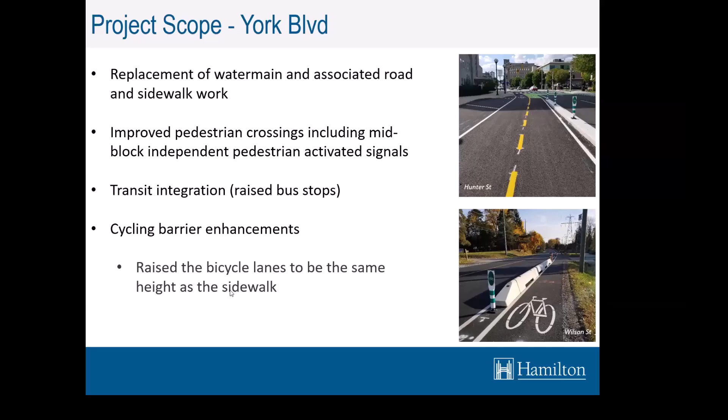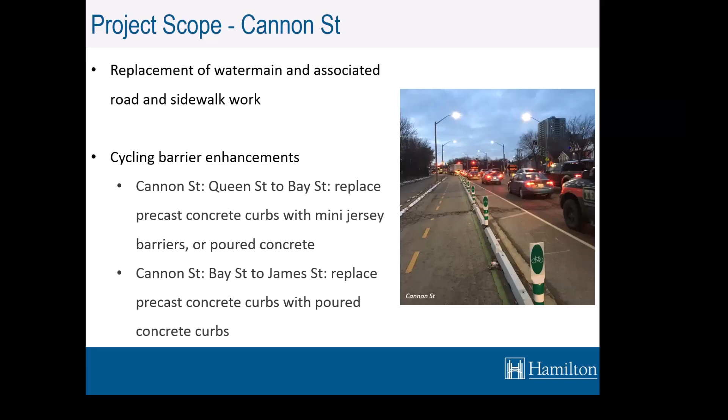Also, on Cannon Street, the replacement of the water main and associated road and sidewalk work will take place. That's the heavy lifting in that section. Cycle barrier enhancements will be done on Cannon Street between Queen and Bay, and Bay to James. They'll be replacing those precast concrete curbs with poured concrete curbs, so much nicer.

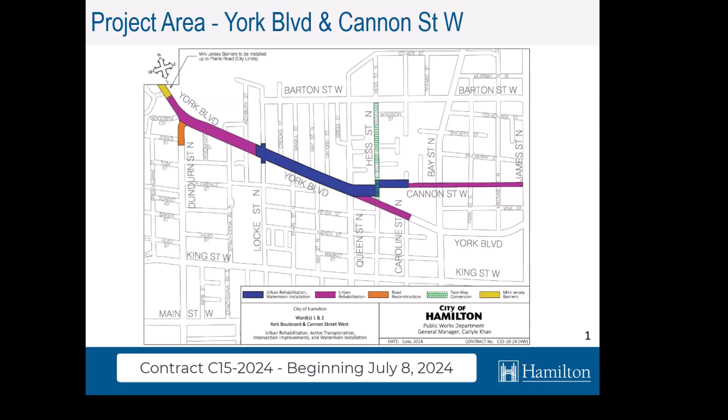Thanks, everybody. The City of Hamilton has a contract with Green Infrastructure Partners, GIP, to complete the works called for under contract C15-28-24. Construction is scheduled to commence on or about July 8th, 2024, with the north side being completed by December 2024, and the south side in 2025, starting in April 2025 and completed by August 2025.

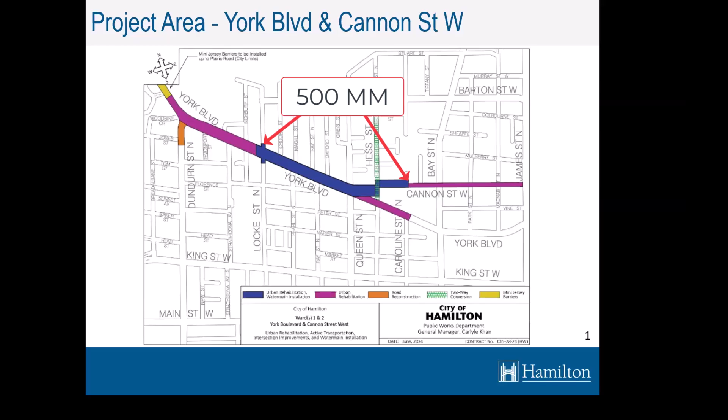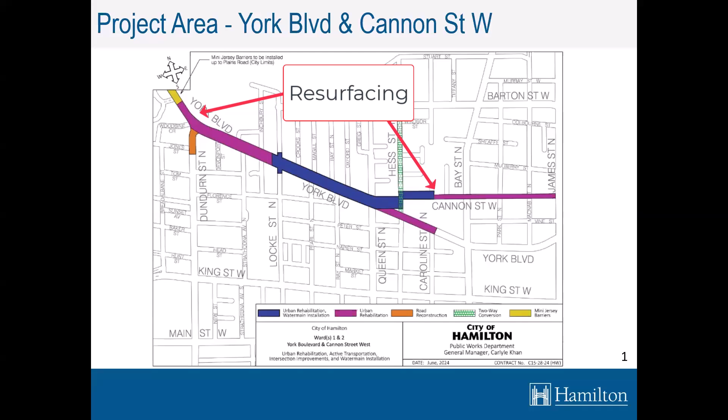The works are as follows: a 500 millimeter water main installation from Locke Street to Caroline Street, road resurfacing on Cannon Street from James to Queen, York Boulevard from Caroline to 100 meters west of Dundurn Street, and road and sidewalk reconstruction on Dundurn Street North from York Boulevard to Jones Street.

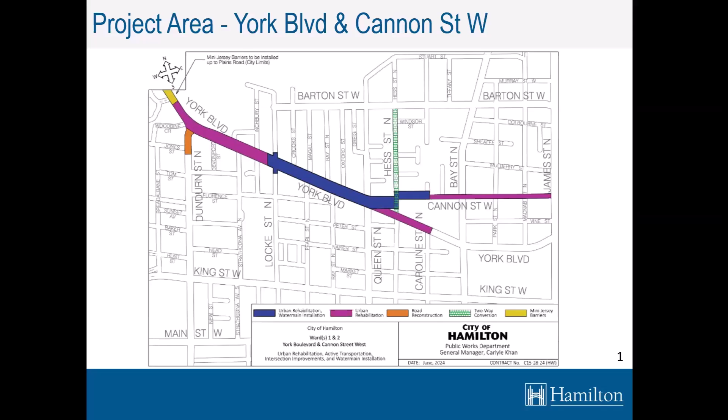There will be intersection improvements at Cannon Street, McNabb Street, Bay Street North, Hess Street North, and Queen Street North. York Boulevard will have intersection improvements at Hess Street North, Queen Street North, McGill, Pearl, Locke, Rolfs, Strathcona Avenue, and Dundurn Street North. Two-way conversion will happen on Hess Street North from Barton to York Boulevard.

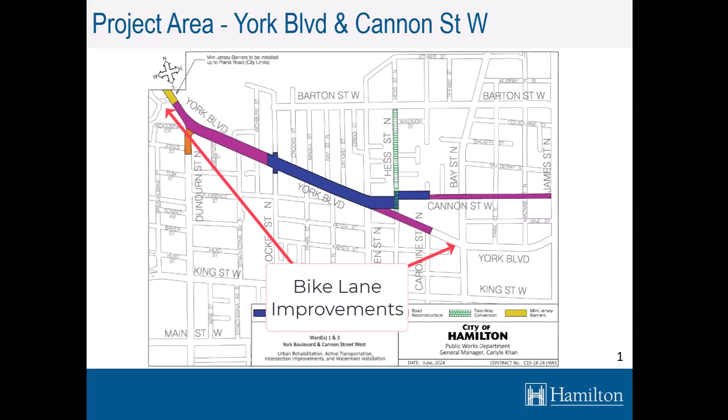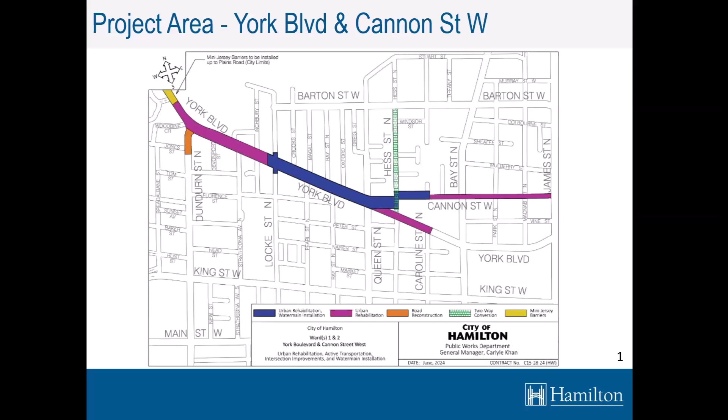There will be active transportation track or bike lane improvements on Cannon Street from James to Queen, and on York Boulevard from Bay Street to the City of Hamilton limit to the west. Just a note that all EMS services have been consulted on the upcoming works and are working with our team, attending bi-weekly site meetings to ensure there are no delays in emergency services to the area.

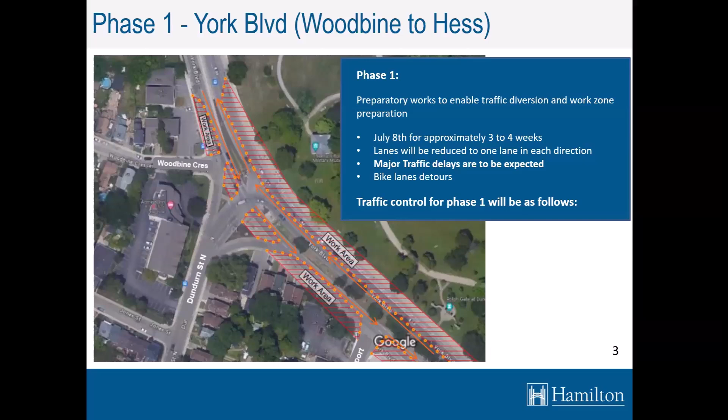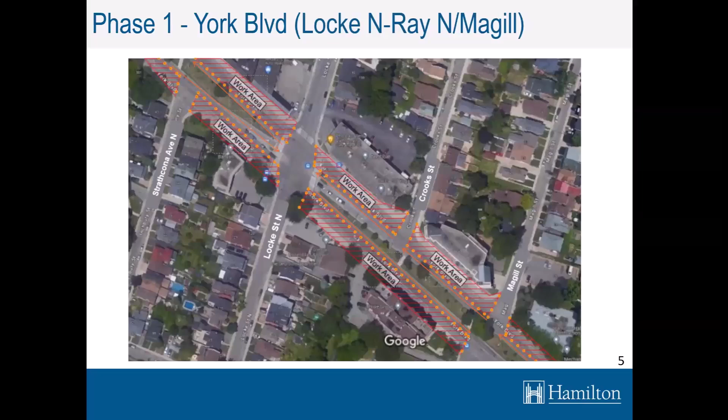That's going to take approximately 3 or 4 weeks. Once this is completed, you can scroll through the next couple of slides showing that section up to Locke, then the next section takes us to Magill and continuing, and this one takes us to Oxford, and you can keep going through there.

This takes us right to Queen Street. Once all of this work in the preparatory stage, or phase 1, is completed, we will be moving all traffic onto the south side of York Boulevard. So we can move to the next screen.

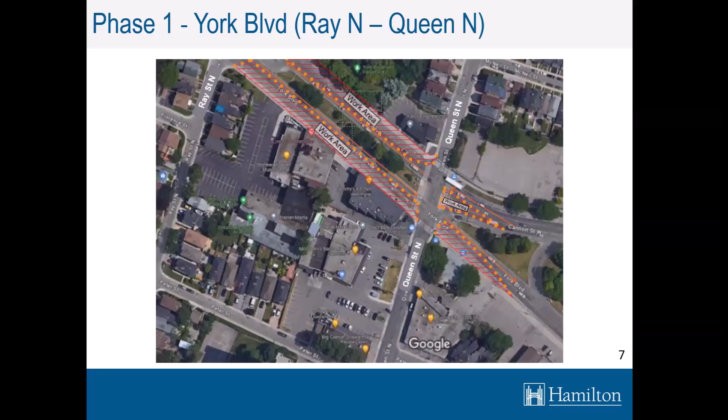I don't like being the bearer of bad news, but unfortunately, with the progress of having this complete reconstruction carried out, there will be traffic delays. So it's always best to try to find another route to the west or east if you live in the area, or if you're joining us from outside of the area, to avoid this section, perhaps moving up to King Street or even further south to bypass the downtown area.

So what this means is that regular through traffic will not be available to York Boulevard. However, as we had mentioned, EMS has been consulted on this, and we will be in constant communication with all of the EMS units to ensure that should the need for access to one of those roads arise, we will be able to get them through the construction site.

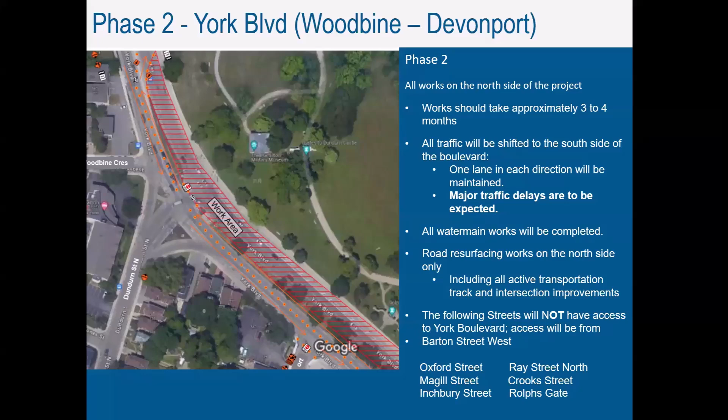And I just want to add that in the case of Inchbury, you're going Barton, Locke, Tecumseh, Tecumseh up Inchbury. So that's if you're accessing the business at York and Inchbury, you will have to come up Inchbury from Tecumseh to be able to access them. Yes, north on Locke, and then you'll head west from there, eventually making your way.

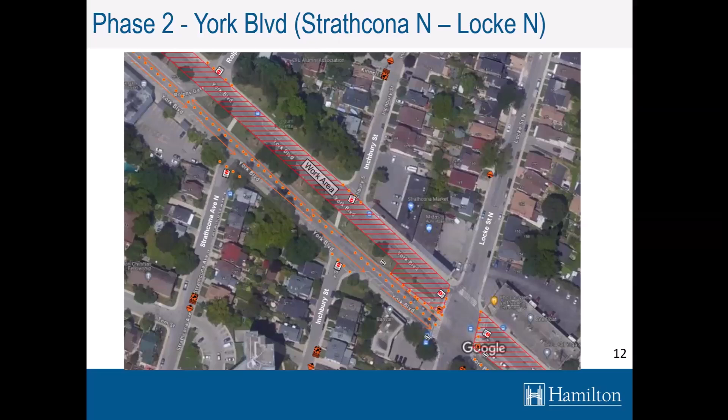Okay, so you can see here, we're working through our slides, Strathcona to Locke in this slide, and then the next slide will take us Locke to Magill, and you'll see that the red hatched area on the north side, all of the north side from the boulevard to the boulevard on the north side of York is all hatched out, and that's where all of the work will be going on during 2024.

And you'll see on the south side of the road what looks like a number of pylons down the middle of those two lanes is actually a delineation between the eastbound and the westbound traffic. You will still be able to turn onto Locke Street at the major intersections.

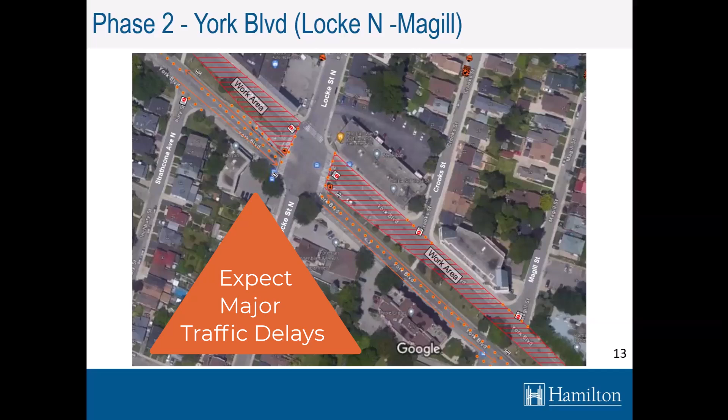Once again, I will revisit that major traffic delays are to be expected. And the next slide, please.

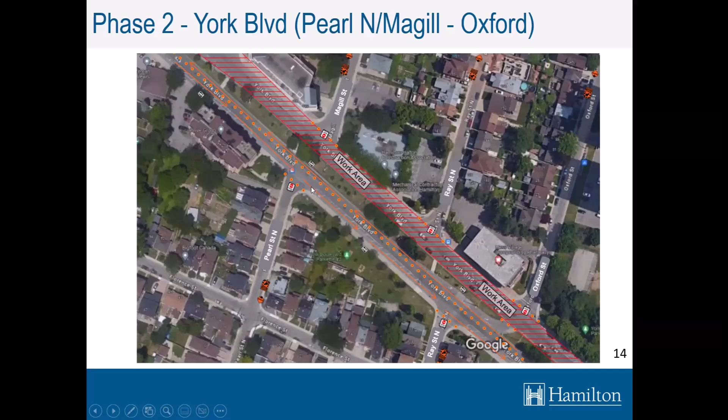And to be clear, on these side streets, there'll be no left turns. If you're going westbound, you cannot turn left into the smaller side streets. Is that correct? Correct.

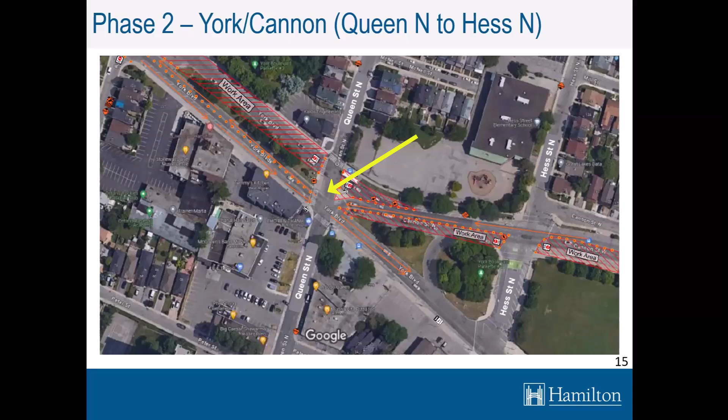We can go to the next slide. And this is the limit of the work for phase 2, and showing the westbound traffic on the north side of Cannon before the merge into westbound on York.

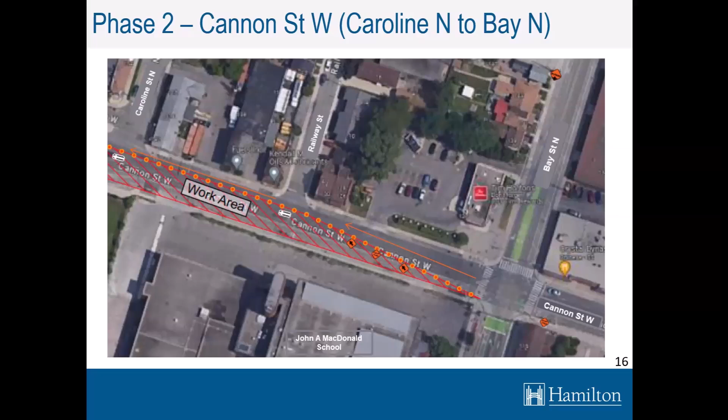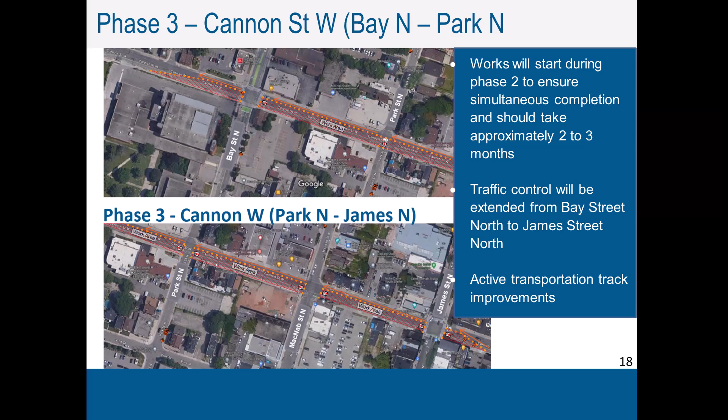Phase 3, the work zone will be extended to include the section from Bay Street North to James Street North on Cannon Street West. The works will start during phase 2 to ensure simultaneous completion and should take approximately 2 to 3 months. Traffic control will be extended from Bay Street North to James Street North, and this includes active transportation improvements, as Councillor Wilson had stated, with new barriers being constructed.

So I just wanted to touch on, when we talk about active transportation, the city does have both eastbound and westbound cycling detours. They are under review at the moment, and they will continue to be reviewed over the next short while until they are deemed to be satisfactory as far as safety goes. And we will release those at the very earliest opportunity, and they will also be posted on the city's website.

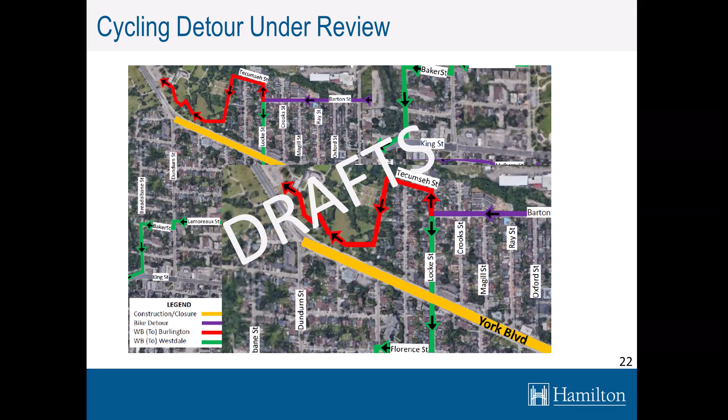For 2025, we will be going ahead and completing the road resurfacing works on the south side, and that will include all active transportation track and intersection improvements, road reconstruction on Dundurn Street North from York Boulevard to Jones Street, and a two-way conversion of Hess Street North from York Boulevard to Barton Street West.

What will happen in 2025? We will be switching the traffic over to the north side, and we will have one lane in each direction on the north side of York, and that will run from April until August.

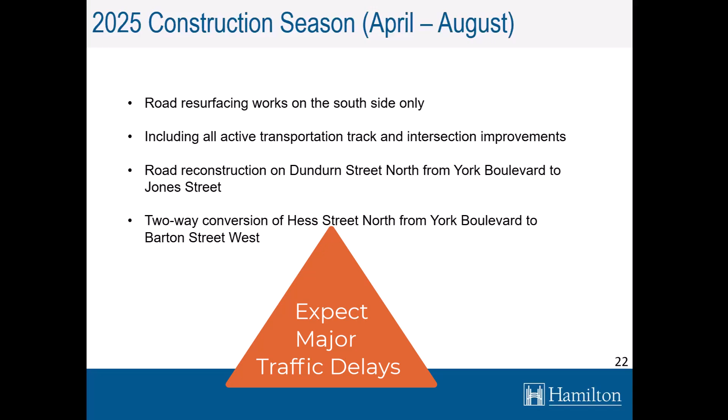And at that point, all of the work will be completed, and we will have our brand new and beautiful York Boulevard and Cannon road reconstruction for everybody to enjoy, as well as the active transportation tracks.

Before we go there, could I confirm, in terms of, if let's pretend we have perfect weather for this, from now until the north side phases are done, will York on the north side open during the winter months for regular flow of traffic, say ideally between December and mid-March, or will it be closed off the entire time until it switches over next spring?

Ideally, it will be completely open at the end of construction this year. That's our plan, to have it completely open at the end of this year. So we will go through the winter with traffic on the north side moving westbound and traffic on the south side moving eastbound.

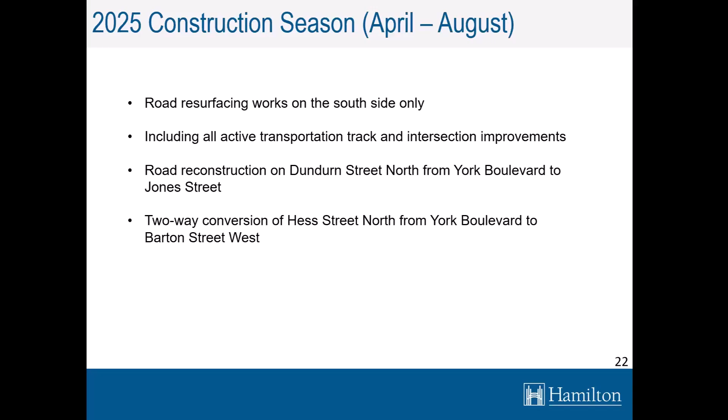Another thing you'll see coming when the construction company moves onto the site on July 8th is that they will be stopping by some of the homes immediately adjacent to the work and asking about a pre-construction survey. Whenever this happens, across all of our projects in the city, we always encourage residents to have a pre-construction survey of their property done.

What they do is look at windows and foundations for your house, just to ensure it's in tip-top shape before construction starts. It's also a protection for you as we move through construction, on the very off chance a problem develops. I don't want to scare anybody, but it's always good protection to have that pre-con survey done. It's no cost to you. The contractor will come by, hire a subcontractor who will then come at a date convenient for you, have a look at your property, and then you'll be protected.

If I could just add to that — on Locke Street, when the major reconstruction was done there, the advantage to residents was clear: it's harder to prove something happened as a result of construction unless you have the pre-construction survey. So if your location qualifies, it's really important that you do it for your own peace of mind.

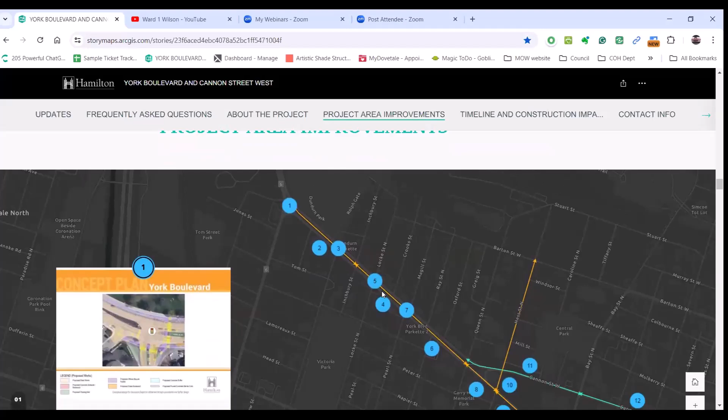Hopefully you can see the story map site, which has a lot of really great information, and will tell you about the project, how the city got there, some of the things that were done in the process, and highlight specific areas of the project to tell you what's happening in them. I thought this was really helpful, being able to click on specific numbers and drill down to what they're doing in that location. Well done on your team's part getting that done.

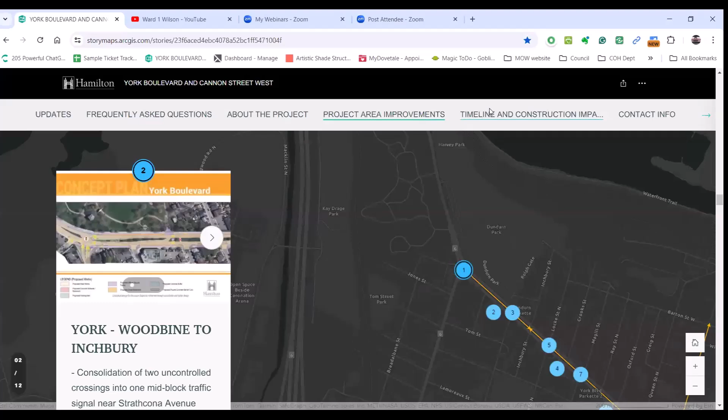I don't know if there's the timeline and construction info, which you're adding more to, and all the contact information there as well. Yes, we will be adding to it as we go along, all the way through the project. We will have updates on where we're at, what the different stages are. So keep an eye on it — make it a favorite on your web browser, and you can visit it regularly to see any updates.

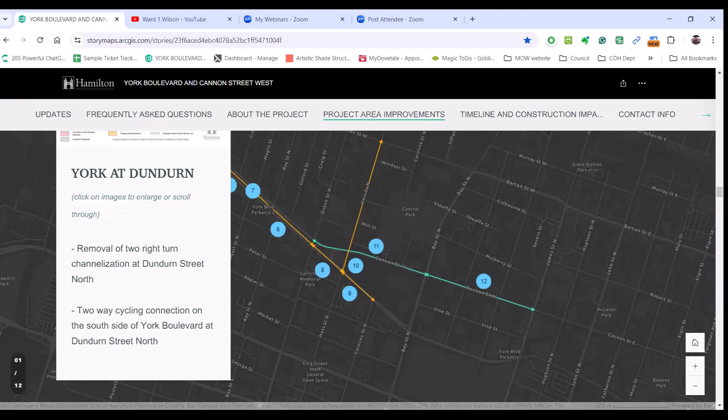And of course, on the city's websites there are always ways you can contact if you have any specific questions. There's also a section for frequently asked questions, and we are currently populating it with some of the questions we get on most of our construction projects. Questions specific to the York Cannon project will be added as frequently asked questions and answers to that section of the website as well. You can see there the contact information for anybody who has questions on the project.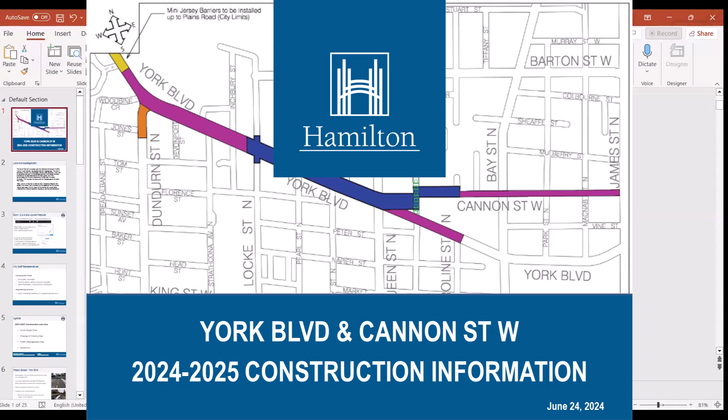Just a little bit of editorial comment from me before we have lots of time to get into the Q&A. This project should not be news to anyone — it's been on and off the books for a long time. In fact, it was one of the first public meetings I ever held, in October 2019, after getting elected.

We held 3 meetings on the design, and just maybe 2.5 months after that, the project itself was put into question because Premier Ford canceled LRT, and the original design was tethered to the LRT project in terms of its environmental assessment.

So we regrouped, and the city rightfully felt work was needed, and we're very pleased to be going ahead. Those 3 meetings were in October 2019. We also had an online meeting at the end of 2022 on the design presentation, and did a walkabout advertised for the neighborhood to walk with us down York Boulevard and talk about life in and around this street. And then, of course, this evening, very pleased to be with you.

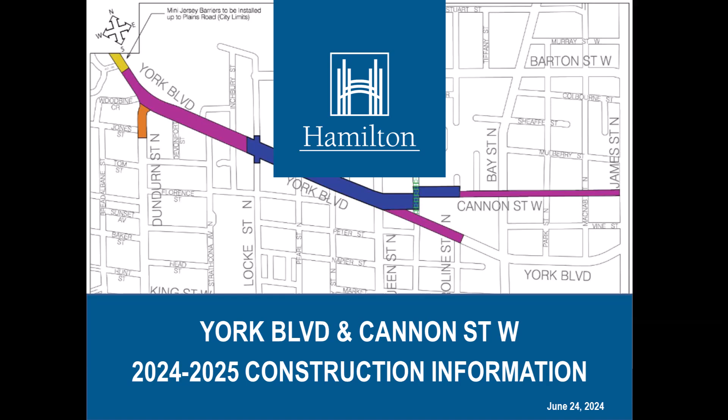Will there be pedestrian access from side streets, for example Oxford Street, etc., to York, or will that also be via Barton? Will folks be able to go up and down York from a pedestrian perspective, particularly on the north side? So folks along Oxford, Ray, Magill, Crooks, Locke, and Inchbury on the north side—will they still have some York Street sidewalk to access during that period of time?

In the reconstruction portion of the project, we are keeping a lot of the sidewalk, mainly between the intersection improvements, where sidewalks will be reconstructed for AODA compliant crossings. The long straight sections of sidewalk in the blocks will be kept, so there will be an opportunity, as long as it's safe for pedestrians, to traverse from the side streets onto that north sidewalk. It's something we'll be looking at and trying to make available for people, as long as it's safe.

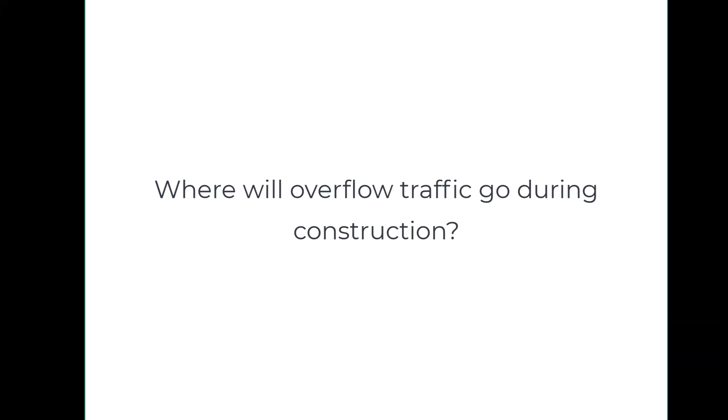Also, a quick note that we are working with traffic to adjust the traffic timing to help the flow, so it moves smoothly through there rather than having odd timed lights just backing up consistently. So traffic will be monitoring that live. They will be tinkering with the timing of those lights and observing it live to see how it best works during the traffic situation and the construction situation.

That's a programming question. So the timing of the lights, as I said, during construction they will be adjusting it, but the final timing of the lights will be set up after construction is completed. It is already on transportation and traffic's radar to keep an eye on this. Once the project is complete and everything is moving smoothly through there, they will be making their final adjustments at that time.

How far into each side street will road work be happening? How deep into Pearl Street will the construction and demolition of the road go? Generally it just goes to the end of the radiuses. So as you come off of York and turn onto the side streets, where the radius ends and the straight section of the side street begins, that's where the construction will end. That's about 10 meters in from the traveled portion of the road, but the end of the radius is the perfect way to describe where it ends. And radius, for the non-tech crowd, is the curved area.

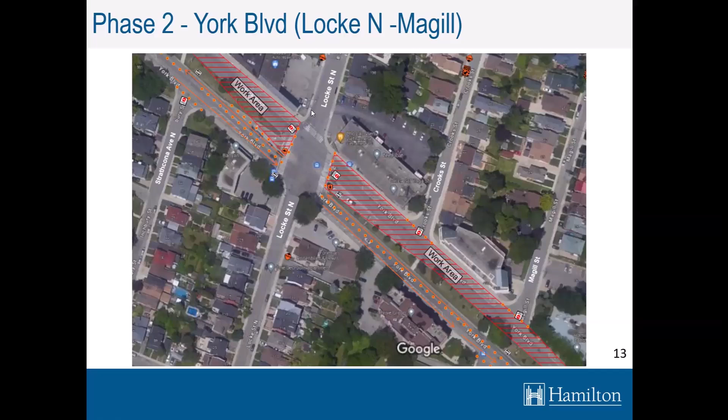While work is being done at York and Queen, will Queen be converted to two ways between King and York? No, Queen will remain one way.

Will the cycling detours be protected? Barton Street isn't really an all ages, all abilities selection for things, so I think you spoke to them reviewing that. Yes, we are reviewing the plans. We do have detours that are in draft, but we will ensure that when they are released and put into play, they will be approved and safe.

Will any of the trees in the boulevard between the westbound and eastbound lanes of York have to be removed because of construction? I think that's the center median. I believe so. Any trees that have to be removed have already been removed, because you're not touching the center median at all, other than curb work and some crossings for the pedestrian signal.

That's correct, and there are trees that will be planted in the center median. Any of the removed trees were dead or grossly inactive as far as producing leaves, but they've all been removed. Any of the tree work going on there will be in 2025, at the end of the project, just before we open it up. There is a tree planting plan where we will be putting in a few new trees. So keeping what we've got there now and getting more.

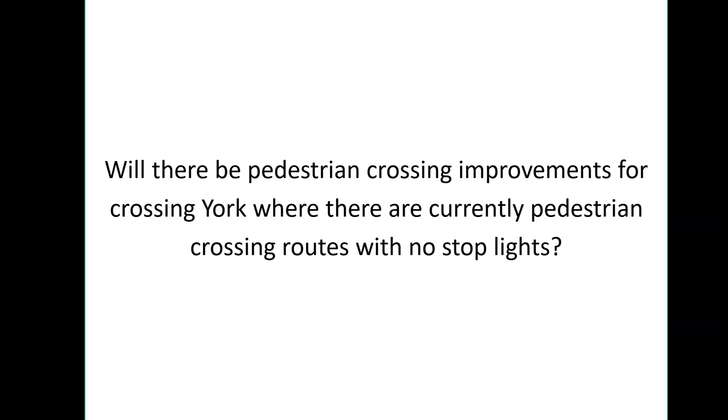Will there be pedestrian crossing improvements for crossing York where there are currently pedestrian crossing routes with no lights, no stoplights? This is a design question, and you'll be happy to know there's a video that tells you what's coming there.

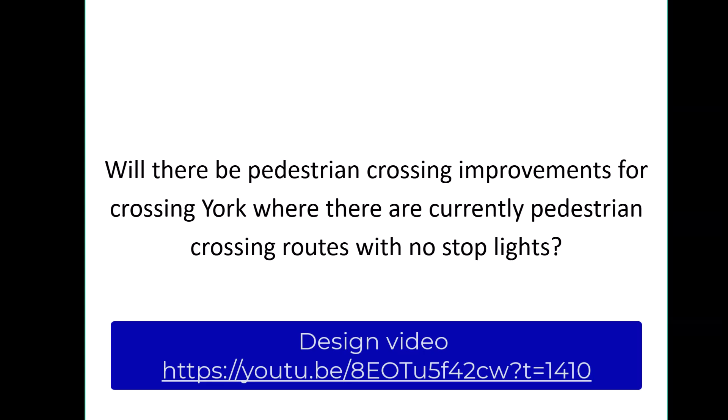That includes two independent pedestrian signals, Strathcona to the west of Inchbury, and then from Pearl to Magill. Those independent signals allow you to push the button, it turns red, and it stops traffic completely. It's at the pedestrian's ability, they activate it. It's not automatic, you push it, you control when it happens. So that's kind of a bonus. But if you look at our video that we described, and is in the links, you'll be able to see more information on the specific crossings like that.

Are the streets that are closed because of construction going to be temporary dead ends? Will parking be permitted on both sides of the street? No, parking remains the same as it is currently.

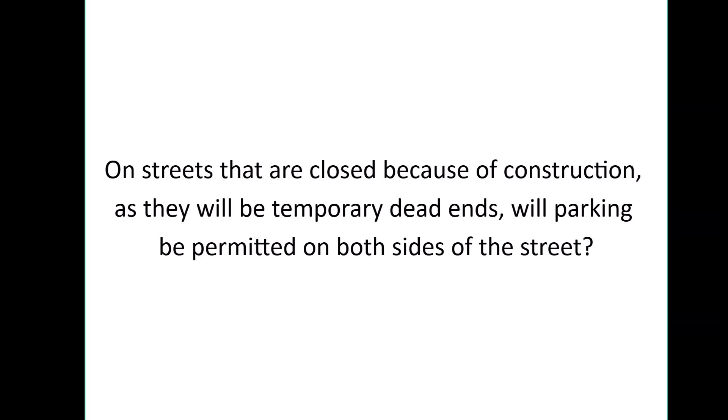And then nobody should be parking at the dead end side at the end? No, we still need access for fire trucks and EMS services. We still need to maintain emergency access, so we would not want parking on both sides. That would make it hard on some of those side streets, hard for a car to make it down there, never mind a fire truck or an ambulance. So we would like to keep it clear.

Will the cycling route, when it's done, be well signed? Mark is with Cycle Hamilton, I believe he's on the city cycling committee, and they have lots of suggestions for creating safe cycling routes. He just wants to make sure that it's really decently signed during that period of time. Yes, they will be. Super, thank you.

There's a full cycling plan that aligns with Book 18 as far as active transportation goes. So it will be fully signed, and I think that the cyclists who will be using that route will be happy with how it's signed.

With traffic being diverted along Barton, will street parking be changing, particularly on Barton between Queen and Locke, which has only single lanes in each direction? Will the parking remain on Barton during this period of time, or will it be removed? There will be no change to the parking on Barton at this time. Everything will remain, so if there's parking there now, it will in fact remain.

Martin is wondering about adjustments to curbs. I know a major reason that many north-south routes can't be converted two ways is the turning radii. Will those sidewalk curbs be adjusted such that two-way conversions, Caroline, Hess, for example, will become possible in future? Anywhere that we are changing to two-way, we will be making adjustments at the intersection. All of the intersection improvements will accommodate the turning that is appropriate for that intersection.